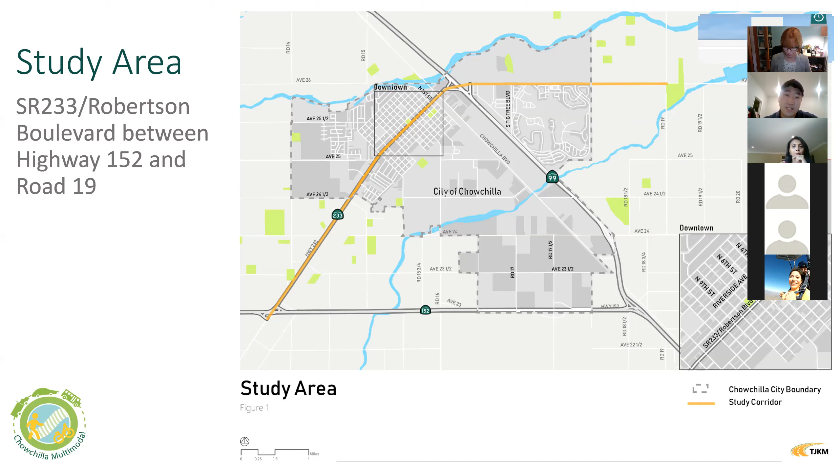So what have we done so far? Since 2019, the project team has done lots of research and analysis on the existing roadway system, traffic conditions, and traffic safety hotspots. We looked at topics such as whether Robertson Boulevard is heavily used by trucks, and what the bicycle riding experience is like out there. In February this year, we presented these findings to the Chowchilla Planning Commission, as well as the Madera CTC board.

We have also done extensive public outreach from the get-go. In April of this year, we published a community outreach summary report, which is a midway summary since we're still soliciting feedback from the public. In that report, we documented input from residents, businesses, and stakeholders. We also developed concept alternatives, which we'd like to present today for more feedback and suggestions. Most recently, we held a stakeholder advisory committee meeting in June to go through initial ideas and receive comments. All these materials are published on the website.

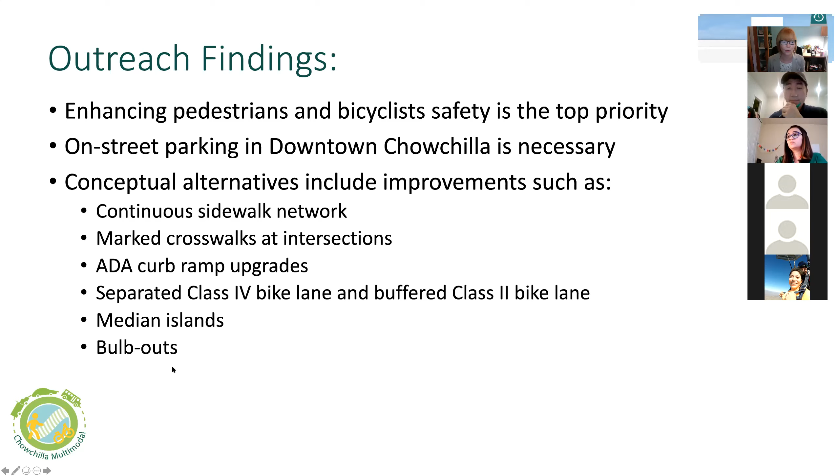Thank you, Kim. So here we are, and we're here to discuss the concepts that have been developed for the entire study corridor. So like Ian mentioned before, the extent of the study corridor includes Robertson Boulevard from Highway 152 to SR-99, followed by Avenue 26, which starts at SR-99 and goes until Road 19. So Kim, can we go to the previous slide?

Thank you. So as we can see, the corridor has been divided into 7 segments, looking at the existing conditions of the right-of-way and surrounding land use to help develop the most applicable alternative for each segment. And as you can see here today, we will be focusing on segment C, which is the urban boulevard in downtown Chowchilla, which runs from 15th Street to Front Street.

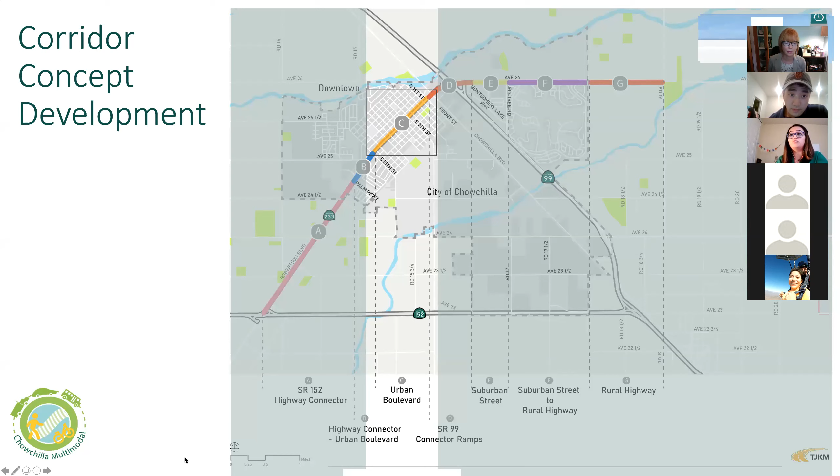Four different design alternatives have been developed for this segment. The underlying goal has been to improve bicycle, pedestrian, and transit facilities, along with recommending traffic calming solutions to enhance safety for all modes of transportation. The design takes into account the surrounding land uses, existing pickup and drop-off zones around schools, as well as parking surrounding commercial areas in downtown Chowchilla.

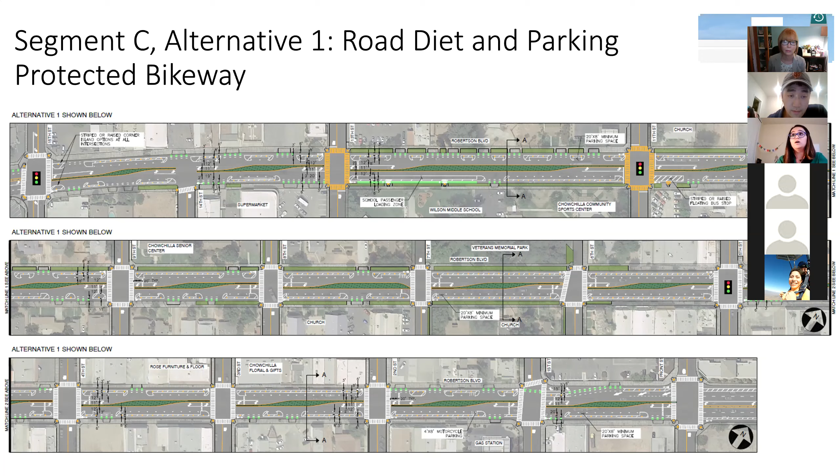So looking at the slide here, this is alternative one, which is called road diet and parking protected bikeway. So what are the improvements suggested under this alternative? Next slide, please, Kim.

So taking a closer look at the plan view, we can see that currently the segment of Robertson Boulevard is a 4-lane roadway. Here what we are doing is reducing it to a 2-lane roadway to make room for parking protected bikeway. So right next to the travel lane, we have provided for on-street parking. This alternative provides for 8 feet wide parking spaces, giving us a total of 227 parking spaces all along the corridor. Right next to the parking spaces, we have flexible posts, and right next to that, we have parking protected bikeways.

Landscape medians along with left turn openings are also provided at selected intersections. This alternative has ladder style crosswalks, which are recommended at locations wherever they will be feasible in accordance with California standards. Along with that, we have ADA compliant curb ramps at the corners of all intersections. The design does consider all the existing driveways, entry and exits along the corridor so that we don't block any of those existing entries and exits.

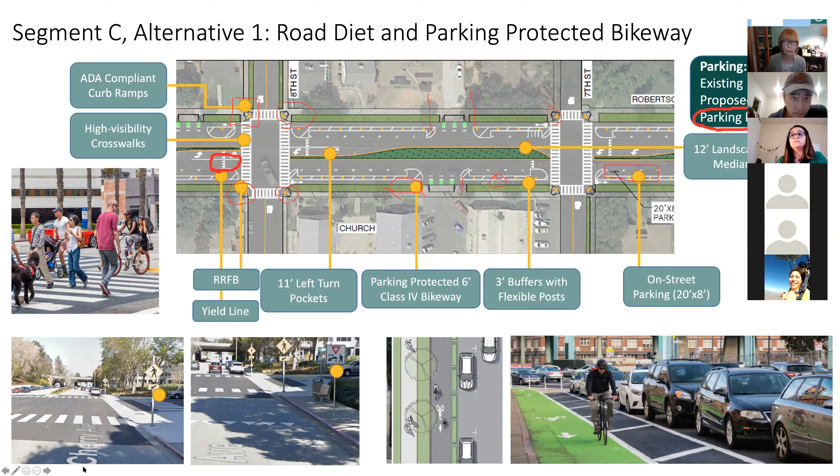Let us now quickly look at the graphic which represents this alternative. Next slide, please, Kim.

So looking at an existing cross section, we can see that Robertson Boulevard is a 4-lane roadway with a center turn lane and parking provided on both sides of the corridor. In the proposed cross section, we can see that the 4-lane roadway has been reduced to a 2-lane roadway. So we have one travel lane, a center turn lane, and on-street parking along with a parking protected bikeway right next to it.

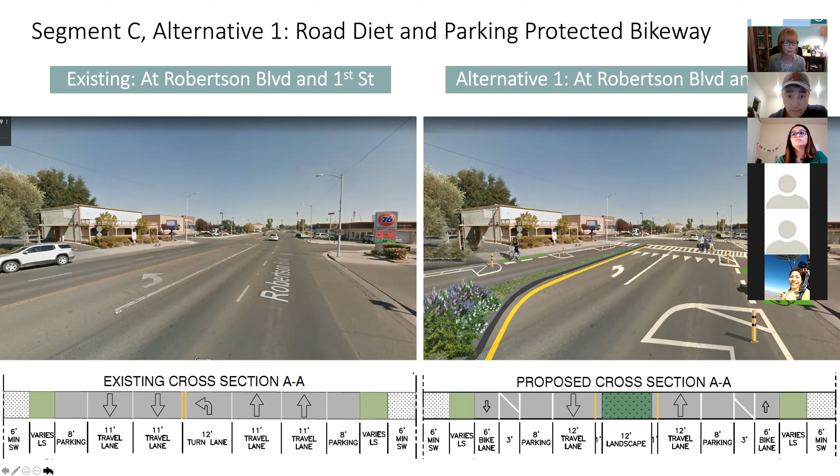We also have another graphic which shows the same alternative. This is the existing condition between 7th and 8th Street. As you can see, the existing condition has a 4-lane roadway with a center turn lane and parking on both sides of the roadway.

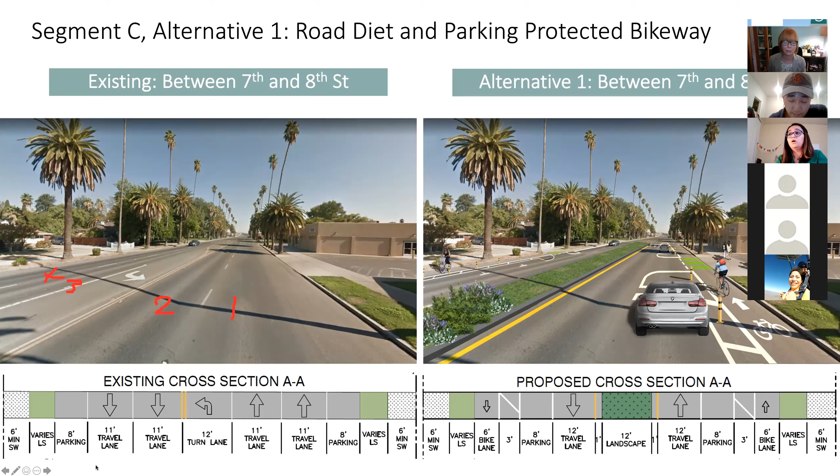In the proposed section, we first have a landscape median in the center, one travel lane in each direction, a parking lane, and then a parking-protected bikeway. Next slide, please.

So that was alternative 1. Coming to alternative 2, which is called separated bikeway on a 4-lane corridor. What are the improvements we're suggesting as part of this alternative? Next slide, please.

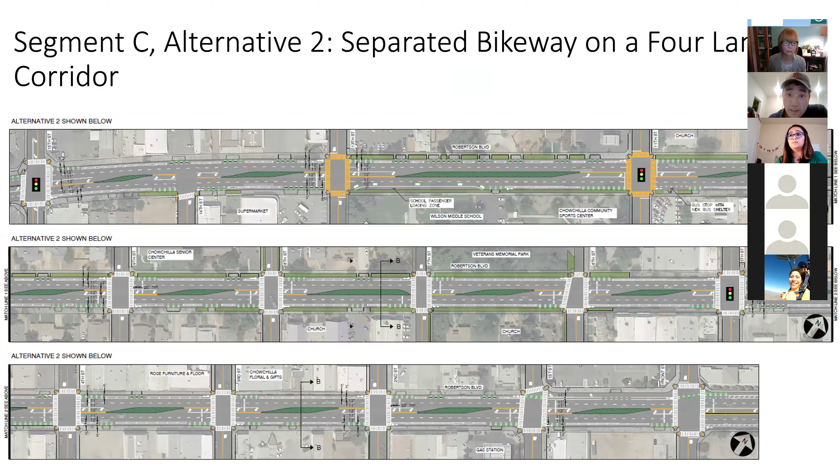Zooming into alternative 2, we are retaining the 4-lane roadway of Robertson Boulevard with 2 lanes in each direction and a center turn lane as we approach intersections. A separated bikeway is also present, with bike lanes separated by wide buffers all along the corridor. Along with that, we have a raised landscape median with center turn lane pockets as we approach intersections.

All on-street parking in this design alternative has been eliminated, which is really the downside of this particular alternative. We have an existing 324 parking spaces along this segment, and this alternative provides for 0 on-street parking spaces.

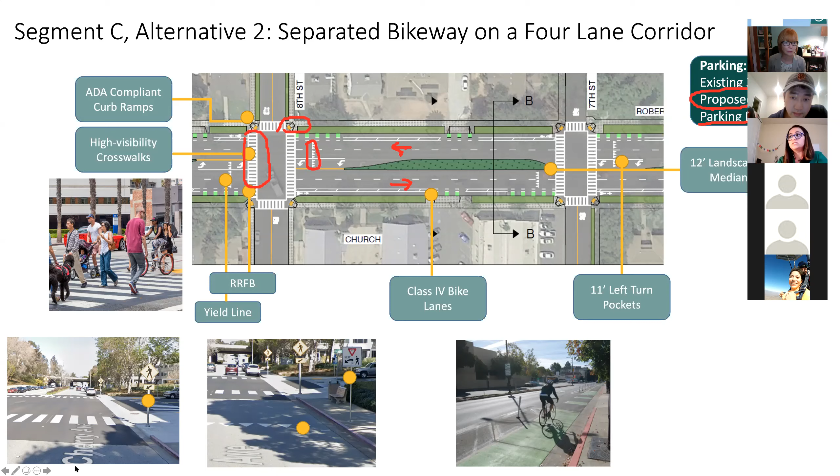The rest of the improvements include ladder-style crosswalks wherever feasible and applicable according to California standards, ADA-compliant curb ramps, yield lines, and flashing beacons. Again, all existing driveways, entry and exits, and passenger loading and drop-off zones around schools have all been accounted for and remain accessible. Let's quickly see a graphic depicting this alternative.

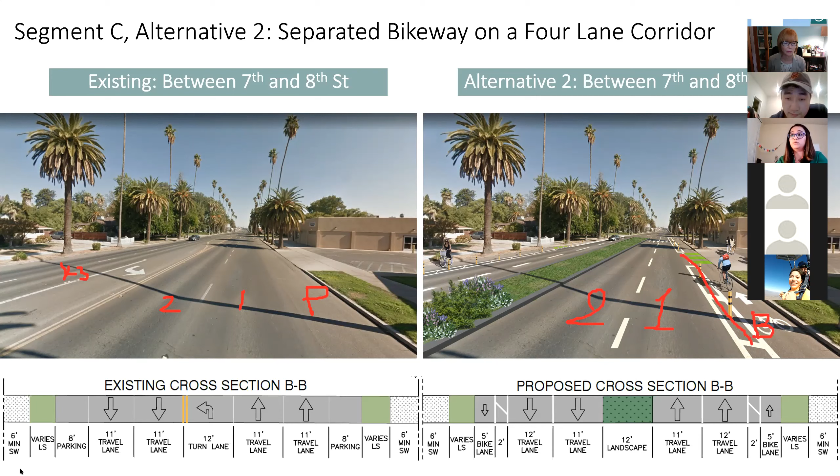Looking at the graphic, on the left side we see the existing condition: a 4-lane roadway with a center turn lane and parking on both sides of the roadway. In this alternative, we are still retaining a 4-lane roadway, along with adding landscape medians and a separated bike lane. But again, we are losing parking 100% since there's no right-of-way present. That's alternative 2. Next slide, please.

Coming to alternative 3, called class 2 bikeways and bulbouts. Alternative 3 has been divided into 2 parts. First, we will look at a plan from 15th Street to 10th Street. Next slide, please.

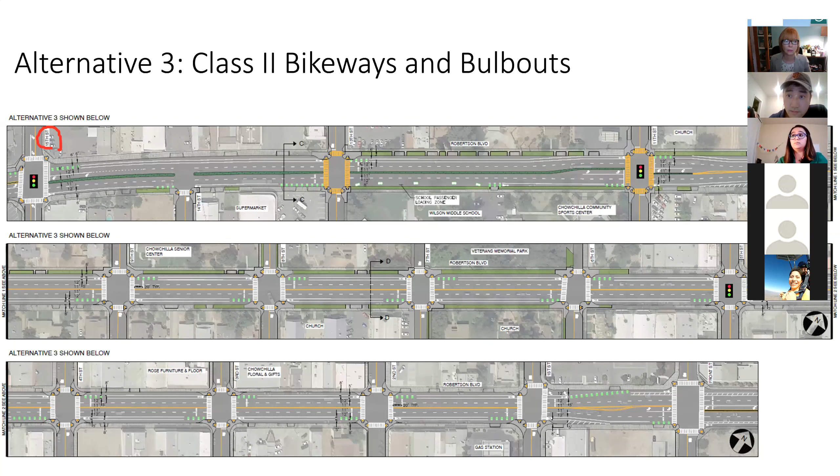Zooming into alternative 3, what are the improvements we're suggesting? A 4-lane roadway has still been retained, with a center turn lane only present at signalized intersections. Next to the travel lane is a dedicated bike lane on either side of the roadway. Considering the existing right-of-way, parking in this segment from 15th Street to 10th Street is provided only on one side of the roadway, while eliminated on the other side. Along with that, we can see a raised median in the center of the roadway.

What's the coolest thing about this alternative is that we have bulbouts present at the corner of every intersection, making it extremely safe for pedestrians by decreasing their exposure to vehicles and shortening the crossing distance. Bulbouts also help reduce vehicle turn speeds by physically and visually narrowing the roadway.

Left turn lanes at intersections have been eliminated as part of this alternative. Along with that, we have ladder-style crosswalks wherever feasible and compliant with standards, a yield line present, and flashing beacons, which are also recommended. Next slide, please.

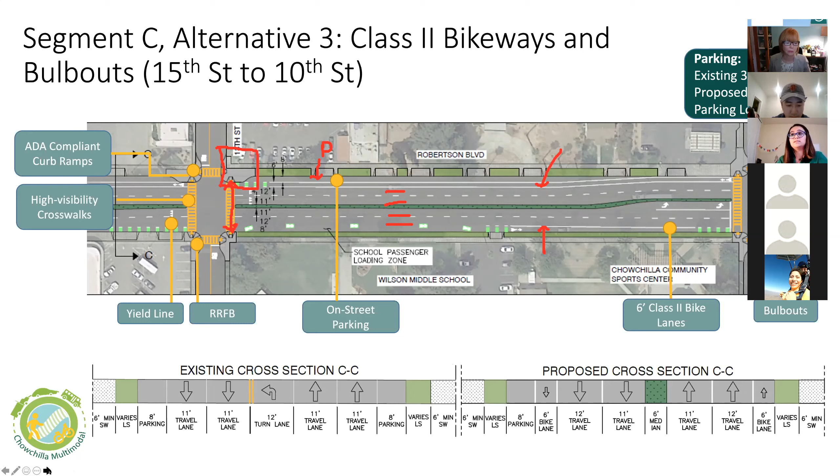The highlight of this alternative is again the bulbouts, present at every corner of the intersections, making it extremely safe for pedestrians by decreasing their exposure and shortening the crossing distance. In alternative 3, we are providing for 231 on-street parking spaces, which means we will incur a loss of 93 parking spaces.

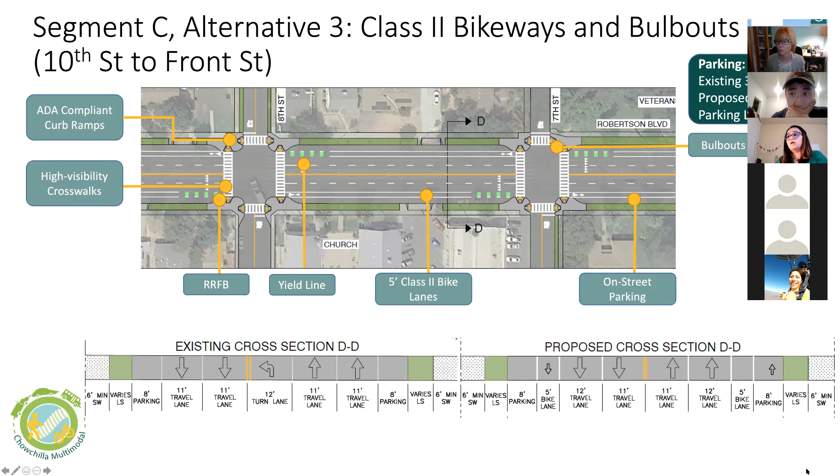Along with that, we have ADA-compliant curb ramps, ladder-style crosswalks, yield lines, and flashing beacons, which are the other pedestrian safety enhancements recommended as part of this alternative. Let us now see a graphic that will show us this alternative.

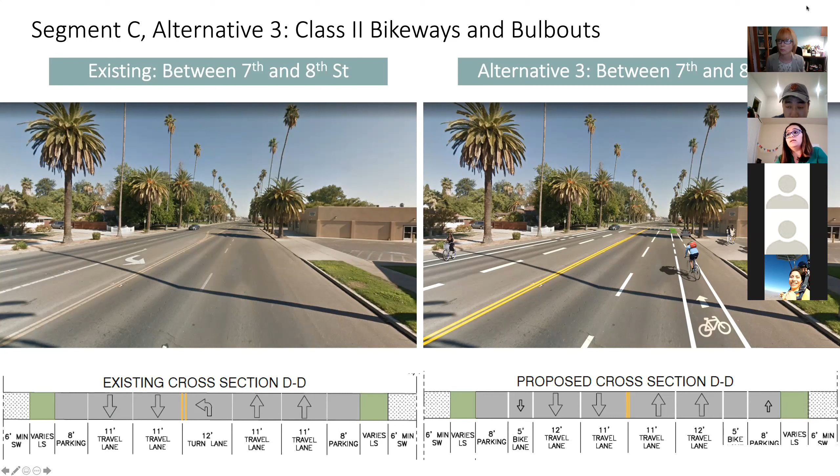Looking at this graphic, we can see the existing conditions: a 4-lane roadway and parking on both sides of Robertson Boulevard. Looking at alternative 3, we are retaining the 4-lane roadway. We then have a dedicated bike lane, but it's not separated or buffered, and right next to the bike lane we have a parking lane all along the corridor.

One of the drawbacks of this alternative, actually two of the drawbacks that we found, was that we were restricting left turns, and bike lanes are not protected in this particular alternative.

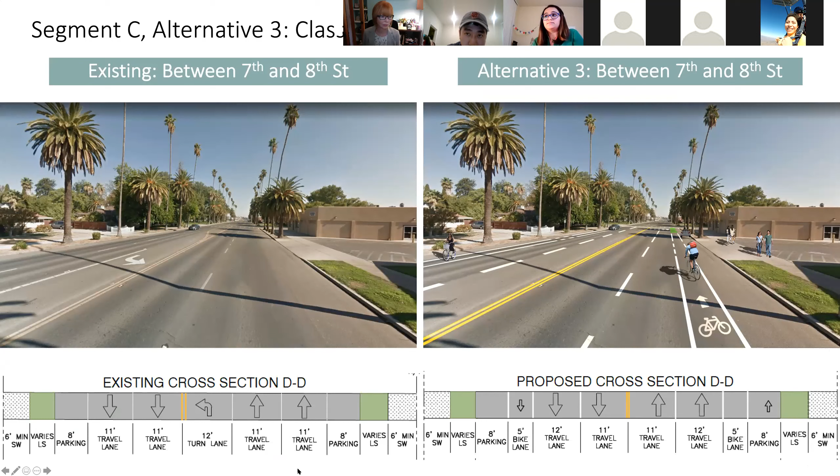So we will now look at alternative 4, which we call the two-way left turn lane. The improvement suggested here is that the 4-lane roadway is reduced to a 2-lane roadway with one lane in each direction. Along with that, a two-way left turn lane is provided in the center to ensure that cars are freely able to make left turns at intersections or driveways.

Right next to the travel lane, we have a separated bike lane with buffers, and right next to the bike lane, we have provided on-street parking on both sides of the roadway. In this alternative, again similar to alternative 3, we have 231 parking spaces in total present along the segment.

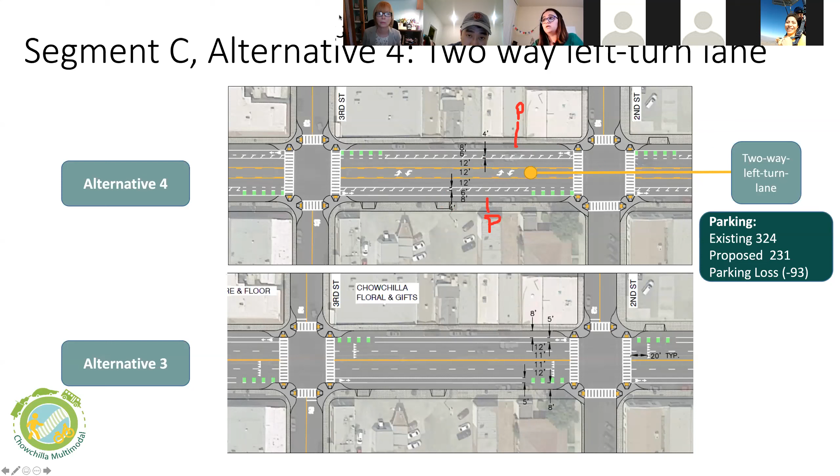The rest of the improvements are similar to alternative 3. Bulb-outs have been provided at every corner of intersections, making it extremely safe for pedestrians. Along with that, we have ladder style crosswalks, ADA compliant curb ramps, and flashing beacons recommended to enhance pedestrian safety.

So alternative 4, with all the improvements suggested in alternative 3, helps make sure that the bike lanes are protected, and that left turns are not limited anymore. In addition, we conducted a traffic evaluation and found that reducing one lane is not going to impact the day-to-day traffic demand of this segment. So yes, that is segment 4.

I will now hand it over to Kim for the next section.

Now here we go. We did not add alternative 4, so I am going to put an alternative 4 question in. I'm going to do this quickly, and I apologize that we didn't have this in already. I will get Divya to tell us again what alternative 4 was and how it differed. So give me just a moment, we'll save that.

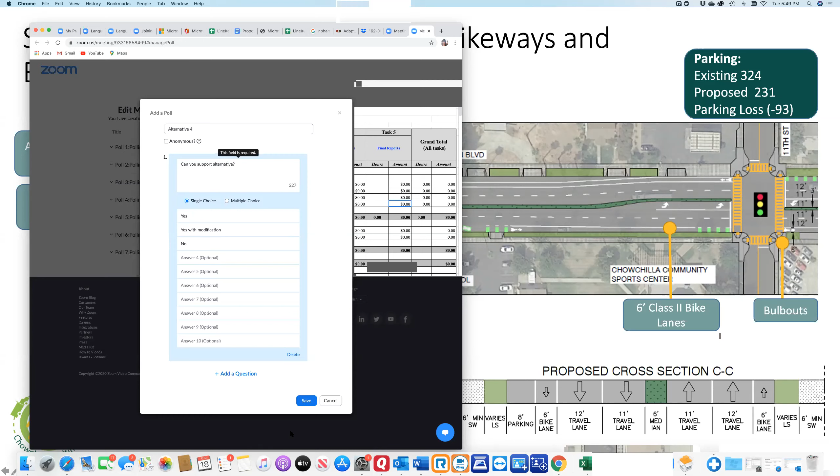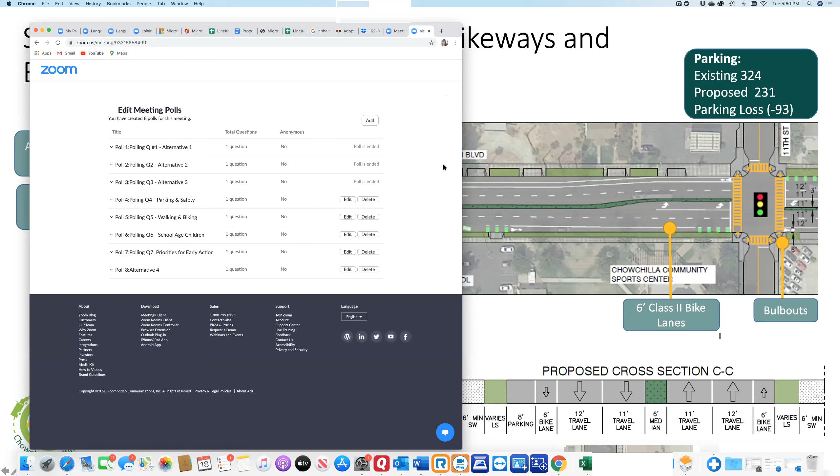I can quickly summarize what alternative 4 was. It was on very similar lines to alternative 3, just that instead of a 4-lane roadway, we had reduced it to a 2-lane roadway with a 2-way center turn lane to ensure that cars are freely able to make left turns at intersections or driveways. Other than that, we did have a separated bike lane with buffers and also on-street parking all along the segment, so that this particular alternative gave us 231 parking spaces in total.

Very good, thank you very much. And thank you for bearing with me while I was putting this question and adding this question to our poll today. So based on what Divya just said, I'm asking if you can support alternative 4 as it's been described to you here. I'm sorry to be talking so much.

No, it actually, we have one travel lane in each direction. So it is a two-lane roadway with a center turn lane, which helps you take turns all along the roadway segment, throughout.

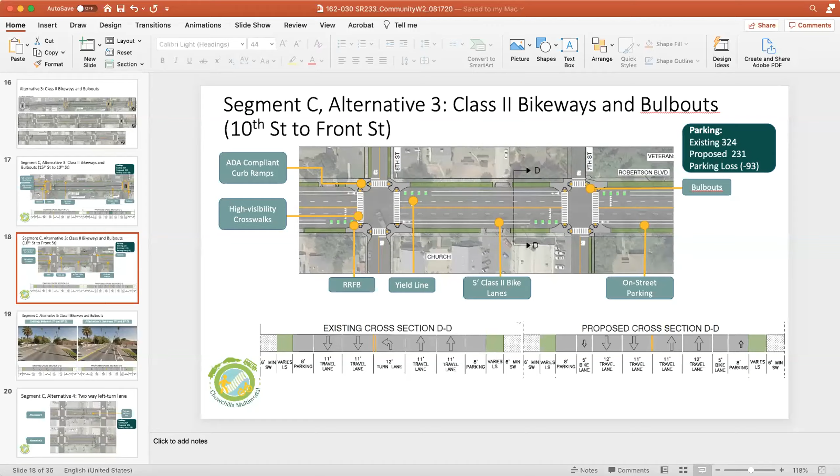So protected bike lanes are really nice, but they have the disadvantage of not easily being able to make a left turn.

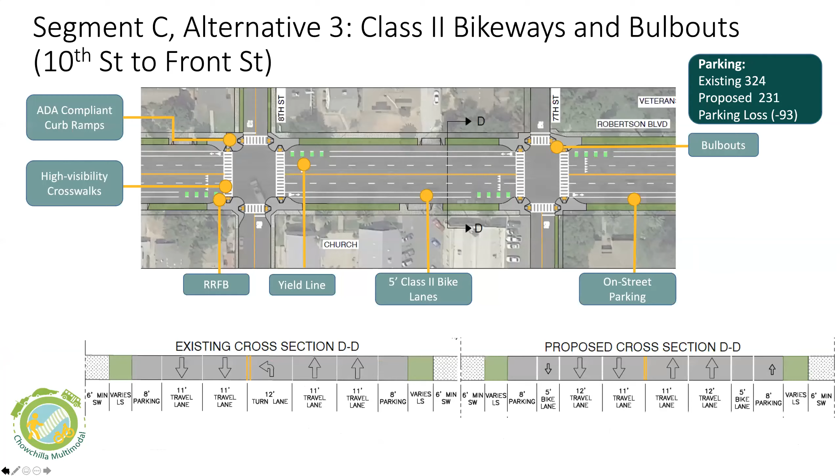Now, alternative 4 we've got up here, and I'm not sure if the bike lane is actually protected. I think that bike lane's only protected on alternative 1. Right, so for alternative 4, we are only having the stripe buffer separating vehicles and bicycles.

That's true. That would not be uncomfortable for me to ride. I would feel safe doing that, actually. Yeah, and that one eliminates all parking along Robertson. Oh, yeah.

So the alternative that had trade-offs up here was number 4. This is the question we're voting on now, and I can relaunch this if folks would like to give a different opinion. As it was, 2 people said yes, one said yes with a modification, and one said no. So I'm going to relaunch that and let everybody re-input if they'd like to.

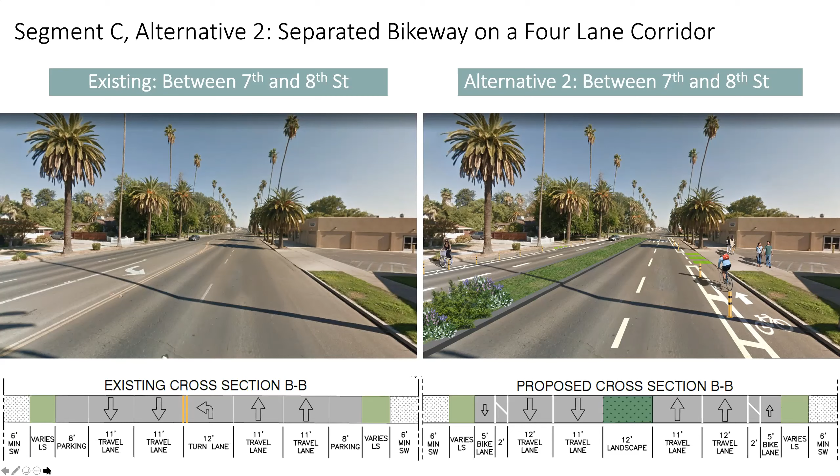There we are. Feel free to have more discussion or go ahead and let us know, either yes with modification, or no to alternative 4. Very good, thank you very much. And it looks like we were evenly split between yes and no.

With that, I have just a few more questions - I promise these will be easier. This is just asking your perception of whether the input given to this point has been expressed in the alternatives you've looked at. So do the concepts presented address the dual concerns of needing parking in downtown Chowchilla, as well as the need for increased safety of bicyclists and pedestrians?

I'm going to launch that poll, and this really goes to the discussion we just had. So go ahead and let us know what you think about the increased safety of bicyclists and pedestrians under the 4 alternatives that were presented. Very good. It sounds like in general, you do think that the parking and safety issues have both been addressed.

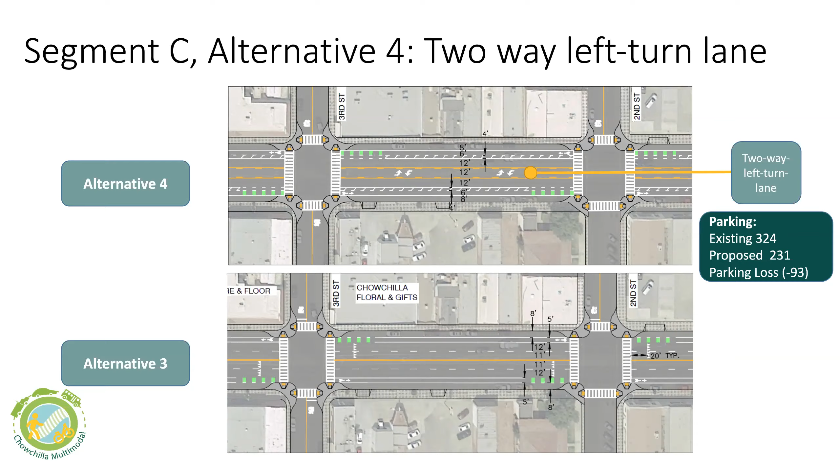This will be very helpful information for the project team. It looks like ADA compliant curb ramps is something that all participants noticed and think would be a good idea. We've got flashing beacons, the protected bikeways, and the road diet as well. So the project team can take those poll results and use those to finalize some of these concepts.